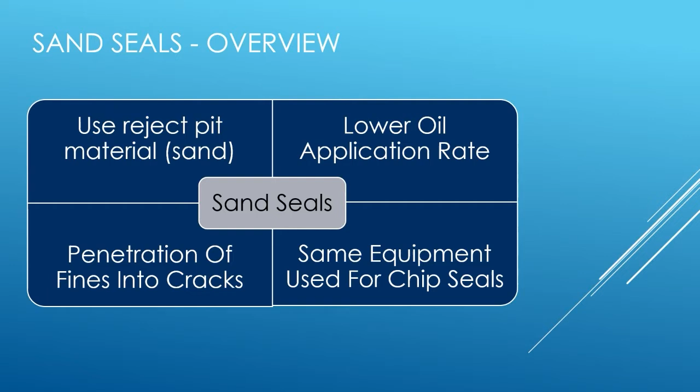So in 2019, we did the first sand seal in LaMoure County in probably 3 or 4 decades. We used the same oil that we use for our chip seals, CRS2P, but at a much lower rate, less than half the rate of a chip seal.

We used it at a rate of 0.17 gallons per square yard. That was the average number I found when looking up different projects that have happened in the past, so I just went with the middle range, and that worked really well for us. It had good coverage and the sand stuck really well.

We did fog seal it just like we would a chip seal—we fog sealed the sand after the project, after the final brooming. We did it at the same rate as our chip seals, just over 1/10 of a gallon per square yard, with the same type of oil we use for fogging our chip seals.

For the sand, we screened our sand piles over a 3/8 minus screen, so we ended up with 3/8 minus sand to make sure we didn't have any oversized material. We attempted to put it down at 25 pounds per square yard. We weren't entirely successful due to the sand being really wet, which I'll talk about in a few slides.

But really that was the only issue we had with the project—we ended up putting down a lot more sand than I would have wanted to.

Equipment wise, we used all the same equipment, but made a few modifications. The one individual who had been with the county when they did sand seals a long time ago retired about a year ago. The only thing he could remember was that they took the tailgates out of the trucks because the sand would tend to bridge and not come out of the truck into the chip spreader. So we just took the tailgates out of the trucks—easy enough. We didn't have any issues with the sand flowing from the trucks into the chip spreader, even with the material being really wet.

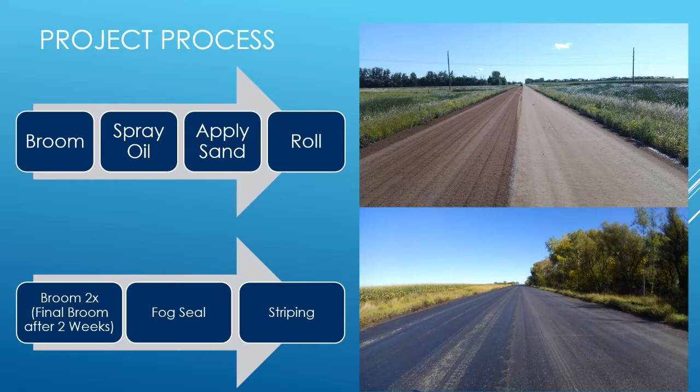The biggest issue we had was with wet sand. If you remember back in 2019, it rained a lot, and I thought I had picked a good window to move and stockpile the sand close to the project. But after we got the sand stockpiled, it rained for like 2 weeks straight, and the sand got absolutely saturated. But I wasn't willing to give up, so we went ahead and did the project anyway.

The sand was really too wet - it wanted to clump together. We had to open the gates on the chip spreader more to allow the sand to flow, otherwise it was just going to bridge. So we probably put down closer to 40 pounds per square yard of sand as opposed to 25.

With that, there was a lot of excess sand, and once it dried out, all that sand had to get removed, and a lot of it came off as dust. Right after the project, when we were brooming and from traffic, it was incredibly dusty. That was really just due to the fact there was all this sand on the road that wasn't stuck to the oil.

But since it was so wet, it stuck to itself very well and packed like concrete. The first time we broomed it, it really didn't take much off. We even went out there with skid steers to scrape it off, and the skid steers could barely scrape off the stuff that was really hard.

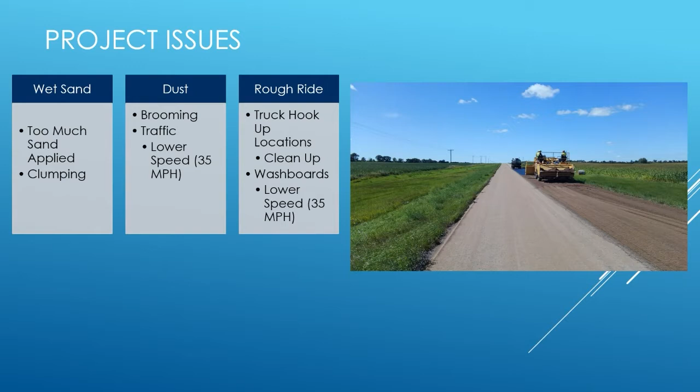So that was kind of a disaster, and I was kind of worried that we were going to have a road like that forever, but it did eventually work itself out.

It's a really thin layer. Not very much oil, not very much sand, but it did cover it really nice.

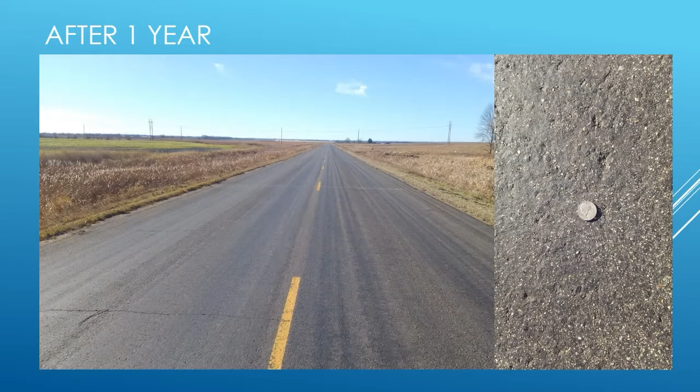You've already seen this picture. This is right after the fog seal. And then this is what it looked like late last fall. It looks the same now. So it held up really well.

The picture here on the right just shows the texture, and it's just a nice closed surface. I think it has really nice road noise, just really pleasant and even and smooth. Just really happy with how it turned out.

We didn't do any sealing of any kind in 2020, just due to some budget issues. But in 21, we got good oil prices, and I plan on doing another 15 to 20 miles of sand seals, just because from what I've seen for us, it just makes sense.

We can do more than twice as many miles as we would with the same amount of oil to chip seal. And for our low volume roads in particular, I think it performs just as well.

Moving on to Otta seals, we have not done one yet. I wanted to try one last year, but we just didn't have the money.

I do plan on doing some Otta seals this year, just to try them and see what happens. I first heard about Otta seals probably a year and a half ago now. I went to the National Local Roads Conference put on by TRB in Kalispell, Montana.

There was an individual there that presented these, and it was kind of the same thing as the sand seals. The first thing that kind of jumped out at me was there's not real tight specifications on what material you use for your aggregate.

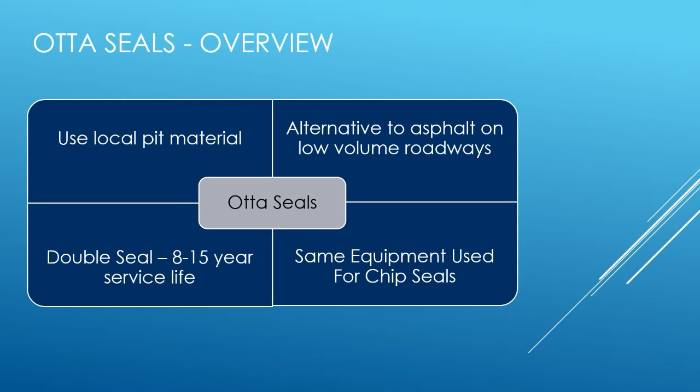So project materials, this is where the research I've done - it varies a lot on what people have used for oil and aggregate gradations. For oil, Minnesota's done a lot of research projects. I know Iowa's done some. I'm sure there's more, but those are the two I've looked at.

They have found they have really good luck by using emulsions, so the HFMS2S, CRS2P - we're going to try it with the CRS2P. But then you look outside the US, like in Norway, where this first came about, they like to use cutbacks, which we don't really use much here anymore. But it kind of seems like it doesn't really matter a whole lot what type of oil you use, as long as it's a good flowable oil, it should work.

We're gonna, like I said, try to use the CRS2P the first time and see what happens. The rates also vary on what different projects have used. They have had better luck with the higher rates, so I think we're gonna try definitely something in the 0.5 range.

Higher than 0.5 gallons per square yard. The whole idea is that the oil comes up through and there's enough oil to come up through all the rock and bind it together into, basically, asphalt on the roadway. I'll talk about how to do that here in a minute.

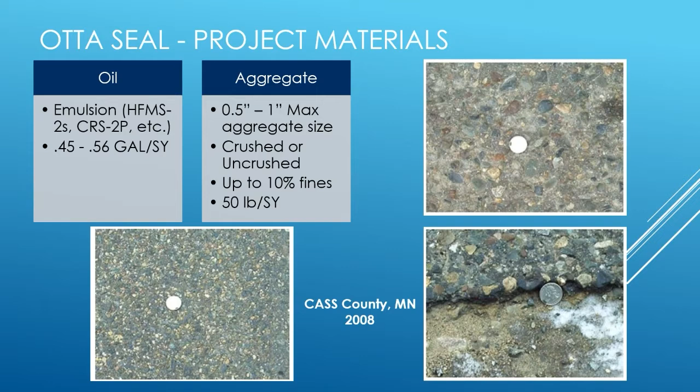These are a couple pictures I pulled from a research project done in Cass County, Minnesota. The two pictures on the right would be your 1-inch max aggregate size—you can see how big the rocks are. The one on the left would be a much smaller max aggregate size. They've had good success with all sizes of aggregates, so it's encouraging to know you don't have to have a real tight spec to make this work.

For project prep, the one thing with Otta seals is there's really no structural strength. It's very flexible, so you don't have much to deal with transverse cracks since it expands and contracts really well, but it has no structural strength. So any subgrade issues, you're going to want to fix those—it's not going to bridge over anything. You also don't want loose material on the surface, like on this roadway here. You're going to want to blade this all up, wet it if you have to, lay it back out, compact it, and seal it. You don't want to give it time to dry out and start to gravel out material again, having all that loose material on the surface.

The project process starts out just like a chip seal—you spray your oil, apply your aggregate—but where it changes is when you start rolling it. There's a lot of different information out there about rolling, but the point is you want to roll it a lot. I've read 2 to 3 days—you just keep rolling it. What you're doing is kneading the rocks and the oil, working the oil up to the surface, essentially. I think Iowa has a draft special provision for Otta seals, and they say to roll it 30 times, then let traffic on it and let traffic do the rest. The key part is the rolling—you can't roll it too much, just keep going.

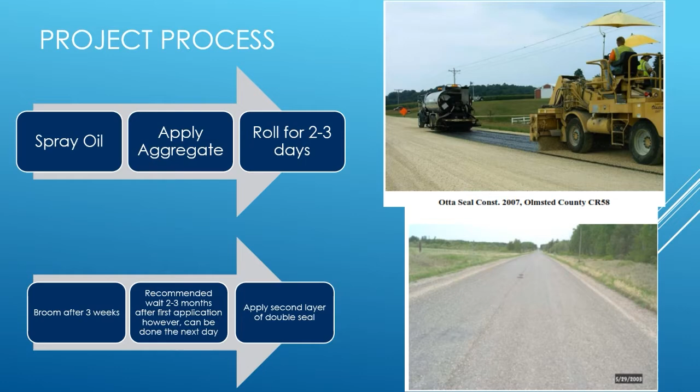So when I first heard about the Otta seal, what I was excited about, where I want to try it, is on our county gravel roads where we just can't keep up with the washboard. You all know where these are: intersections, curves, hills, any place you're accelerating, decelerating, turning, and also places where you lose the crown in your gravel road, matching into a flat bridge or a railroad crossing.

These are some examples of pictures I took last week in LaMoure County. It's kind of embarrassing, especially this one on the curve. You'll lose your lunch going over this curve at more than 35 miles an hour. And we just can't keep up. There's too much traffic here to keep this from washboarding.

So this is where I'm going to try it, like the 500 feet leading up to an intersection through these curves. Because other than these places, these roads, you blade them once a month and they're fine, except for these places. So we can eliminate these areas. We won't have to run our blades out to these roads nearly as often. At least that's my hope.

And then also, if I go back a few slides, this roadway right here was paved last spring, or this was asphalt last spring, and the existing asphalt had deteriorated to the point where we were going to grind this up and use the prairie dog money to pave it. And that's what we were telling everybody that lived on that road.

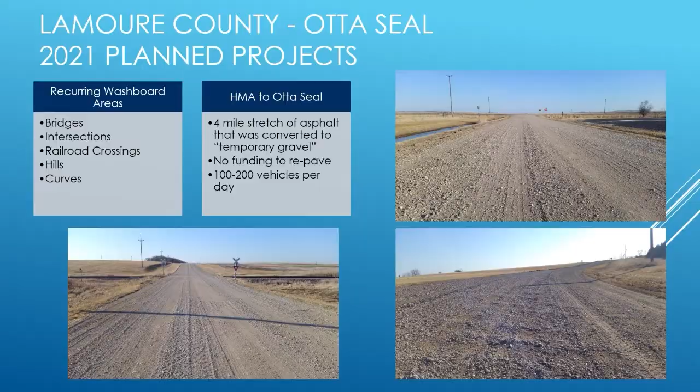All right Josh, we do have a couple questions here. The first one is, have you noticed any difference in skid resistance, or have you done any testing compared with a normal chip seal? No official testing, except that was my concern too. But in talking to people that drive that road every day, and I drive it quite often, I haven't noticed any difference. The surface, after we fog seal a chip seal, is very similar to that surface. It might be a little more dense, not as open, but I haven't noticed any difference, to be completely honest.

Great, and we have another question here. Considering you want to work the oil up through the aggregate by rolling, is hot weather beneficial or necessary? It is very beneficial, yes. You want it, just like when you're doing your other seals, to be hot.

All right, one more just popped up. How long do you expect an OTTA seal to last before maintenance is required? Well, like I showed, the service life is 8 to 15 years. If it does need maintenance, you would maintain it just like an asphalt pavement. You can patch it, and if cracks develop, you crack seal it. As far as timing, I think it totally depends on the road and the amount of traffic. Like I said, I haven't done one, but it sounds like they hold up very well. As long as you do the rolling properly and get good mix on the road, they hold up just fine.

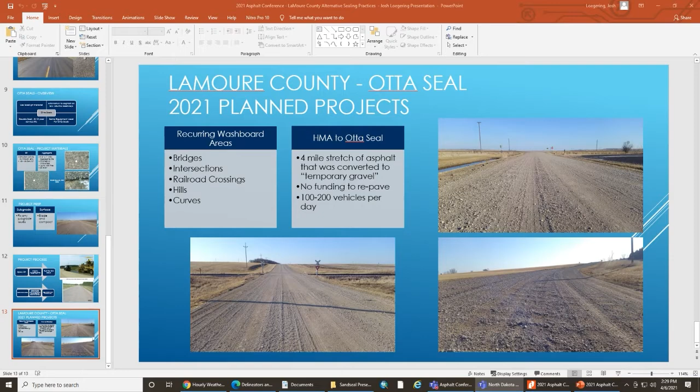All right, okay, before we move on to our next item on our revised agenda, Dale, did any other questions come through on your end?

Yeah, thank you, Carrie. Billings County said that they did an Otta seal about 5 years ago, that the DOT has plans, and interestingly enough, sitting in the room here with some of the experts, actually the king of pavement, Ken Spadine, and Dan Thompson and Steve McCormick, and the Otta seal was used. It's been used for many years. It used to be called a road mix, sometimes it was almost a cold mix. And the old roadway sections, many of our highways were built foundationally with that type of mix.

Does it work? Well, it is. Josh, you nailed it, it is a flexible pavement. What I remember from some of the people with institutional knowledge as I started is that the flexible pavement, that type of treatment, when an overlay was put on it and we didn't do our homework well, sometimes we did a thin structural overlay and it didn't perform real well because we didn't have enough structure. So oddly, that chip seal, double seal, armor coat, and Otta seal, they operate and function differently. But we've been using it for a long time.

Billings County, congratulations to Jeff and the crew for doing that out west. Thank you, Carrie. All right, thank you, Dale, and thank you, Josh.

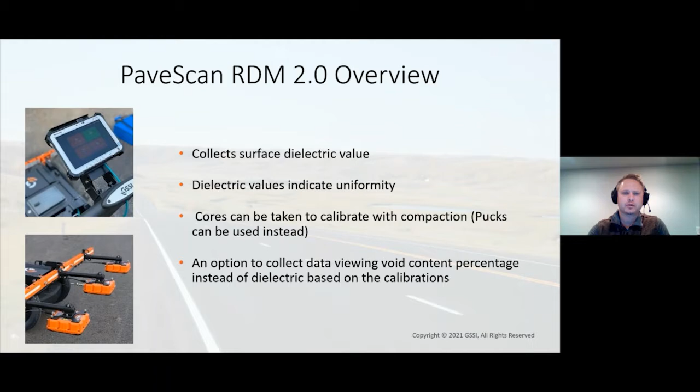This is a picture of my personal Pave Scan. I just got a single scanner going here, and this is on North Dakota DOT project Highway 8. This contractor had a longitudinal joint spec, also had a ride spec on this specific project, but this tool works phenomenal for if you do have a joint or want to see what the consistency of that longitudinal joint is.

You're collecting data in real time as you move down that, so you can really look at the uniformity factor and see if we're compacting that correctly. This contractor did use a notch wedge, and those do help significantly with consistency and quality on that joint.

This was a phenomenal project. It had some of the best uniformity across the mat, transversely, longitudinally on the joint, that we've ever collected with the dielectric, and we'll look at some of that data coming up. But again, this tool works so well for being proactive and finding quality and procedures in the laydown process for contractors.

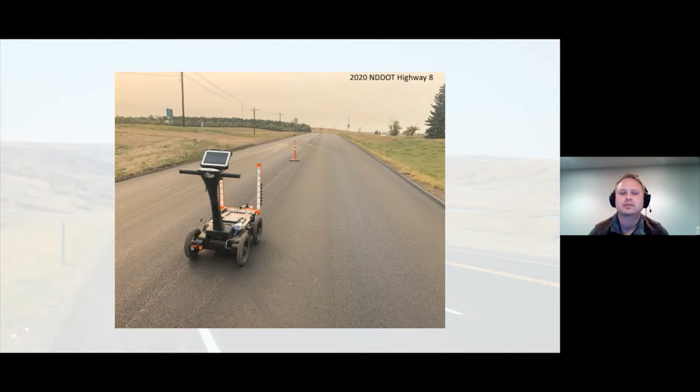So achieving quality with Pave Scan. It's used immediately after compaction. On-site full data shows the potential of possible low density patterns to be evaluated on-site. In a proactive manner, we use this right behind the intermediate and the knockdown to look for uniformity.

Typically we cut this area transversely from shoulder to center line. What we're looking for is uniformity, just consistency in the rolling in that knockdown. Then we jump behind the intermediate and do the same, and then behind the finish.

But what we can find with this tool is beyond our eyes. This actually gives us the data to look at what we're doing. And if we find an issue, we can move forward and look at roller pattern issues.

If we're running intelligent compaction, we can look at the maps through that area and see if we were consistently rolling that area. Very important, roller consistency. If the rolling consistency is good, we have to look at a paver issue.

We can run, if we're running a paver thermal imaging or anything, we can look at the thermal imaging in that area and look at the transportation, the distribution of it from the plant. Was there an issue at the plant? So what these technologies do is allow us to evaluate these areas, identify them, and then investigate them.

That's why we like to integrate technology so much into our quality control programs, because you are really managing errors and managing the production, the laydown process, and keeping those errors eliminated or low to a point where we can keep a good consistent band in the field. And that's what asphalt paving is all about, is consistency.

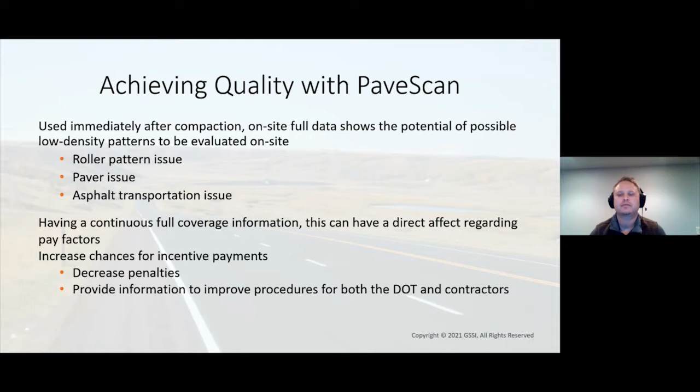When you can keep an overall road consistent, when you're coring locations all over, your band of range of density is a lot lower and typically higher too. So it works really well if you're going for that consistency uniformity factor. It provides the data for the contractor and the DOT to see if quality is being achieved, and allows the contractor to set up a good paving plan and procedures to hit quality to achieve success on these projects. It's really a phenomenal tool for that reason.

So how we use it, we use the Pave Scan as a proactive quality control tool. What we consider proactive is if we can still make modifications to that mat to improve the quality, then it's considered proactive.

The reason the Pave Scan is proactive is it produces data in real time. When we're looking at uniformity behind that knockdown or intermediate, we still have an opportunity to make some modifications to improve the quality. If we have not a very good uniform or a low dielectric in that area out of our band, we can still bring that up. We still have the opportunity to do so in that laydown process.

It provides on-site dielectric values of newly laid and compacted asphalt in real time, and that real time is very important. We can literally walk around with this thing anywhere, and wherever the sensors are, we're collecting data there. So instead of getting that data, that 1% data from coring, we can get 30, 40, 50, 60, 70% coverage of that newly laid asphalt and get a better representation of how that road is actually performing in the laydown process and then the rolling.

We have a continuous full coverage map. It provides a full length compaction contour map. We're just getting that data and seeing what's going on in that mat. Core results calibrate dielectric to compaction percentage, void, density - this is the volumetrics I was talking about earlier.

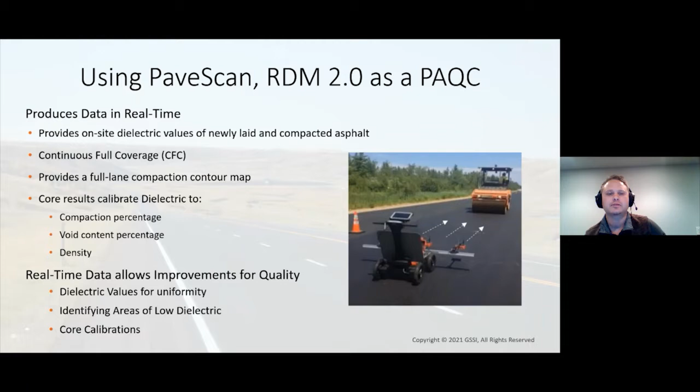So here's an example of what you would actually see using the Pave Scan or the rolling density meter, the GPR. This is courtesy of the Alaska DOT. The Alaska DOT has been using this technology for quite a while now. They're kind of the leading innovators of ground penetrating radar for asphalt. And Rich Giesel up there actually collected this data.

But what this data is showing here, this is a 3-scan system. Up on the top left, you can see LCR - that's the left antenna, center antenna, right antenna. And they actually have this in a density compaction mode.

Look down on the bottom here, you can see the orange, it says example of longitudinal joint. So you see that fall on 841.25 to 841.50, we got that dip or that fall. When we see that, we know that's a low dielectric, a low density area.

So what we can do is identify that, mark that, go back and look at our other technology tools, get a nuke gauge over there, confirm that dielectric, that density is low there, and then we can evaluate it and see what caused that low density.

Was it a rolling issue? Was it something with the thermals through the paver or the mix itself? It might be even something that is out of our control, a section issue with the aggregate or the base that's being paved on. But what it does is gives us the opportunity to identify it and move forward to try to manage and eliminate these areas.

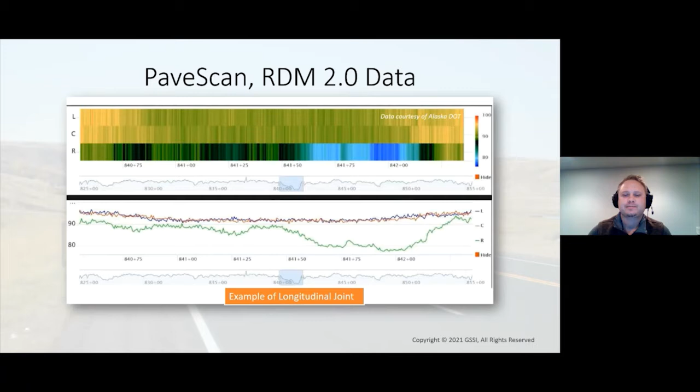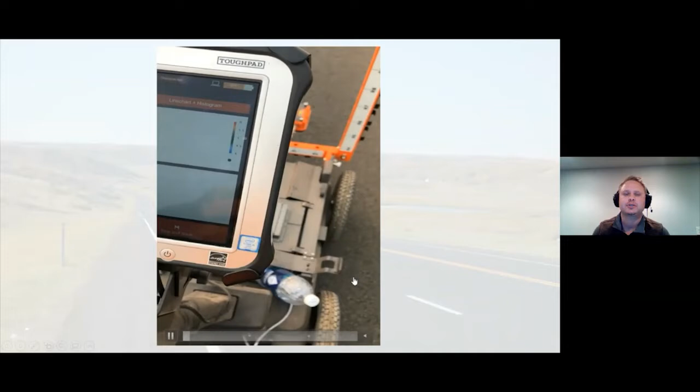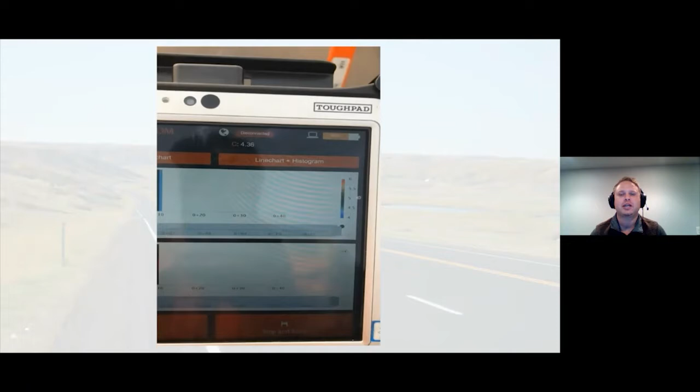This is the actual video of me running my personal Pave Scan on a longitudinal joint. This is out on a project, and I do apologize, I'm trying to talk under traffic and video and push this, and it does get a little shaky. But what I want you to look at is, this is the contractor used a notch wedge, and the uniformity, the consistency of that line.

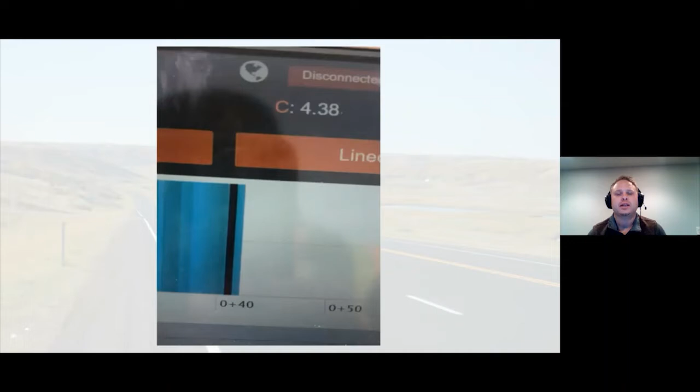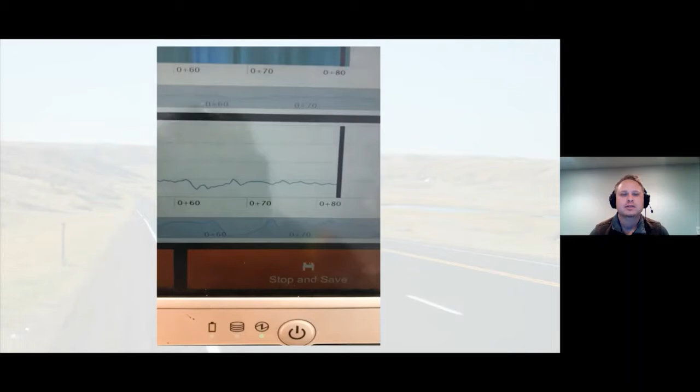And that dielectric up there, that's C. So we got a 4.38. So we try to look for that band. Anything drop below a 4.2 in this specific case, getting off the joint there, trying to push and talk, get back on it a little bit. But we'll look at the screen again here. So 4.40, I mean, very good consistency. We got a couple drops there and peaks, but overall, that's what we're looking for right there.

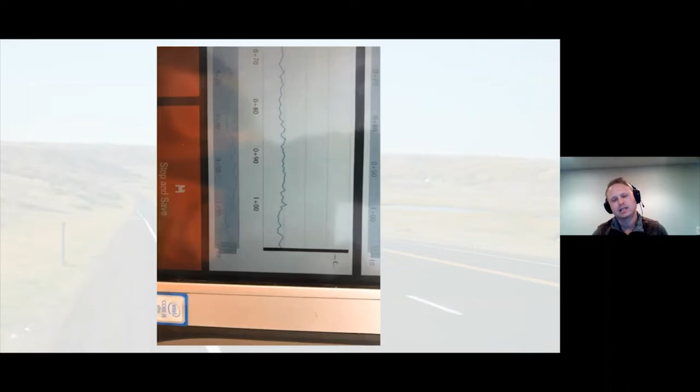Is that consistency. And coming up here, I'll actually cross the seam line, and you'll see a significant drop, and then I'll cross it back. I'll show you when.

Again, I apologize, it gets a little shaky there. Here's the drop coming up. I'll cross the actual seam line into the other right there. So you can see that difference, that dielectric will actually pick up on that seam line.

There's obviously some real low density there, and then we'll cross back and get 6 inches off that joint. But this is how we use it in the field. That's just an example of running it down a joint and what we're looking for. And that's real-time data. We're walking as we go, collecting data every second as we move that cart down.

A lot more efficient and effective than, say, a nuke gauge. If anybody's ever tried to nuke a joint, it can obviously be frustrating. You've got to sit level if there's any kind of gap or bump there. It's moving around trying to get that nuke gauge nice and flat, and this way is just way more efficient, with more data to really evaluate that asphalt section.

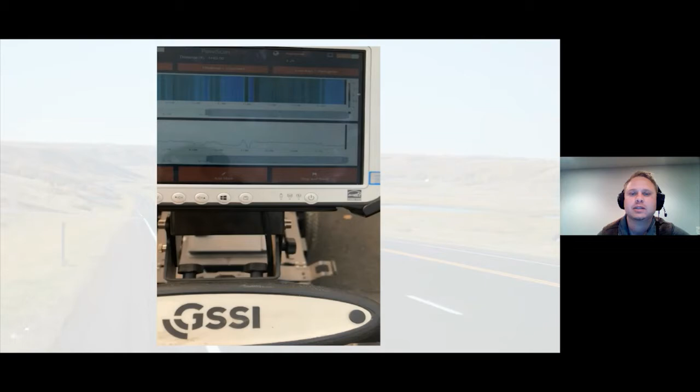Here, we'll just look at lot 2. So 10 shots, say there's 5 cores, the average in that lot was a 4.4 dielectric collected, timed on those core locations. Then once we get the extracted results, we do the same thing, average them. We break them down and look at them individually, but that's too much data for us to look at right now in this presentation.

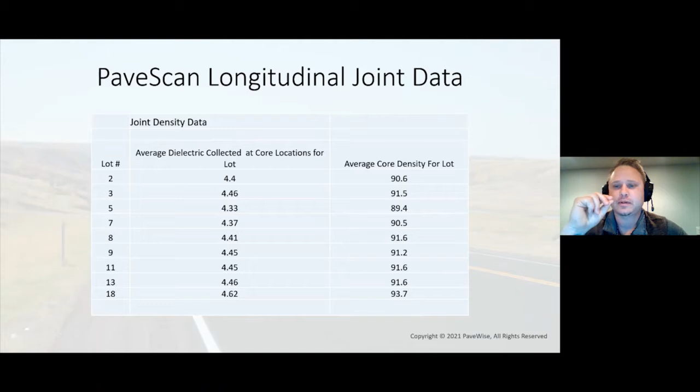So lot 2, the average core density was a 90.6, and the dielectric from the average of the time mode on those core locations was a 4.4. So we're at a good density there. 90.6 is actually a little bit of an incentive, I believe, in the formula for density, joint density. But then if we go down and look at lot 9...

We got a 4.45 average, a little bit higher than lot 2. But our average came back on the extracted cores at 91.2. What I found really unique about using this tool, on this specific project where we had unbelievable consistency and uniformity across the whole mat and on the joint, is look at lot 8, 9, 11, 13, 3.

The dielectric average and the core average - there's 4 or 5 days where they're almost identical. It was just astonishing on this project, walking down 4 or 5 miles and seeing that band so tight, and seeing how accurate this dielectric can actually be in comparison to the average cores.

And you look at lot 18, 4.62, obviously quite a bit higher dielectric. Well, the cores came back super high on that, in that specific lot, 93.7 on a longitudinal joint. That's pretty amazing - all these are really good numbers.

The only one that's a little bit below where we want it to be is lot 5, 89.4 average on the density there, and our dielectric shows that it was lower, on an average of 4.33. So it tells us where we are and where we need to be, and it works pretty well for that reason.

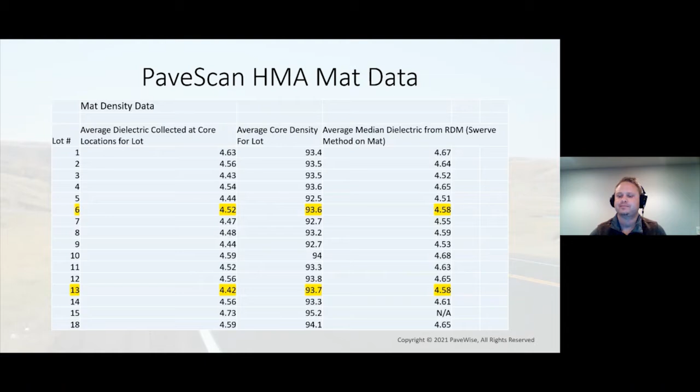So here we're finally getting into the end, but why PaveScan GPR testing? Why is this technology becoming so important and popular and trending within our industry? It's a proactive procedure. We can use this proactively behind rollers, use it to really enhance quality in the laydown, the rolling, the whole process in the field.

There's no physical damage to the asphalt section. We are not extracting cores. The other big thing that's really unique about this tool is we can do it within the construction limits of the asphalt paving. We're not doing it early in the morning or late at night in low light conditions where safety is a big concern. As that operation's moving down, we can be right behind collecting data.

So it's a lot safer way to collect data, and we're getting a way more accurate representation of the entire asphalt section. When you can collect 25 to 60 to 75% more data just by swerving and using the scan system, compared to the 1% you get from cores, you're getting a really accurate representation of the entire asphalt section.

You are really understanding what you're doing. You're not making judgment calls based off of 1% of how your cores came back. You are making modifications and adjustments based on more than half of the data coming back on that mat section, so you're making way better modification and adjustment calls for enhancing quality in that section.

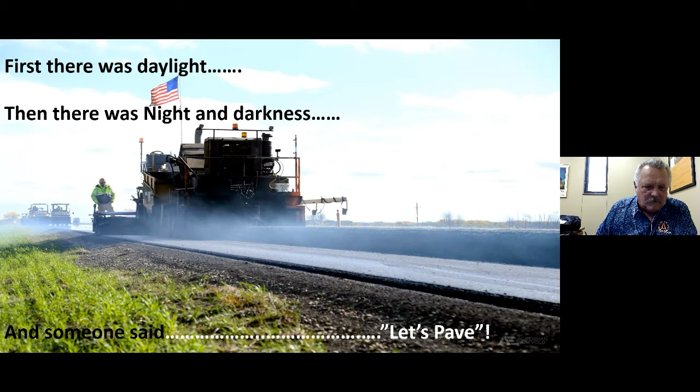This is a virtual event, and to start things off, this is the way we kind of looked at nighttime paving. I mentioned this to Dale the other day, and he said first there was daylight, then there was night and darkness, and then someone said, hey, let's pave. So that's where nighttime paving came from.

One of the things we look at when we talk about nighttime paving is worker safety, of course. It's been a major concern because it's believed that nighttime paving can create hazardous work conditions. There haven't been a whole lot of studies that indicate this, but there's been a few things that I think are kind of interesting.

Arditi did a study in 2007 that concluded that most work zone crashes occurred in clear daylight and good weather conditions. However, a study done previous to that in 1998 by a man named Bryden concluded that one-third of all nighttime work zone accidents involved impacts with either traffic control devices or safety features introduced into the work zone because of activity - equipment and people and that sort of thing. However, 37% of those accidents caused serious injuries to both the motoring public and highway workers.

So as we move forward and talk about nighttime paving, I think it's critical that we put safety at the forefront and think about how we can get this done without causing injury to either the motoring public or, of course, our folks in the work zone.

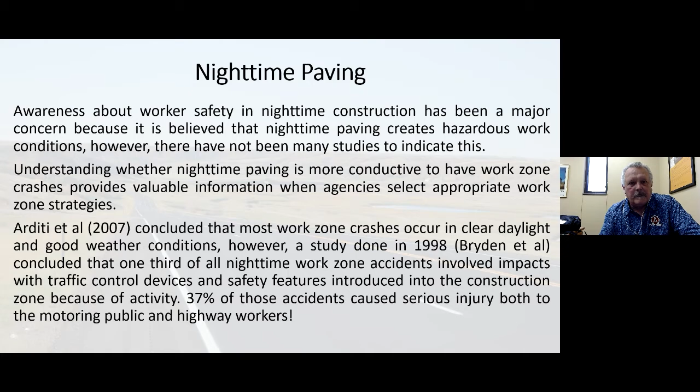Nighttime paving, plain and simply, can be dangerous, okay? We can be looking at things like reduced visibility, worker fatigue. One of the issues we see a lot is the fact that we're putting folks into a different operating time frame than they're used to. So can they sleep during the day? Or are they getting enough sleep so that they're not getting fatigued at night? Lighting issues - the position of our traffic control devices and glare from lights can be an issue.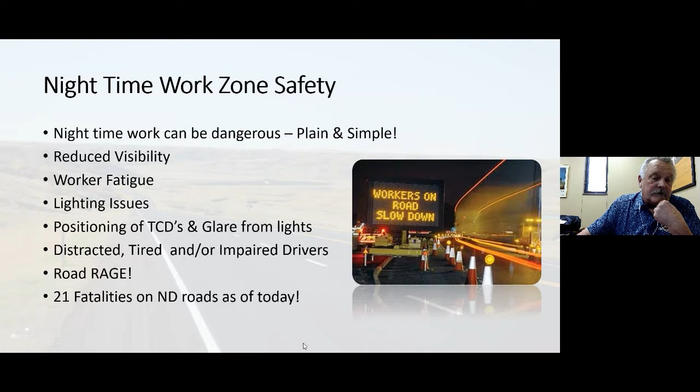Distracted, tired, and or impaired drivers. Road rage. And just as a note, I had something pop up on my screen here, I'm not sure what that is, for soils testing. Just as a note, today I went online and I looked at the Vision Zero website, and as of today, we've had 21 fatalities on North Dakota roads, which is 21 too many.

I don't know if you folks are seeing that or not, but when done safely, there could be a lot of benefits when it comes to nighttime paving.

First of all, in a lot of areas, you're going to see lower traffic counts. You could be looking at reduced temperatures, reduced delays for motorists and construction vehicles.

One of the things that we saw when we were working out west quite a bit in my past career was side access control. So the access roads coming in off the sides, farm to market roads, that sort of thing, were sometimes difficult to control. So you had extra manpower and that sort of thing on hand.

It's not uncommon in southern states like Arizona, where it's very routine to do nighttime paving, just because, especially on asphalt jobs, the temperatures can reach over 100 degrees during the day. So it's difficult to put asphalt down.

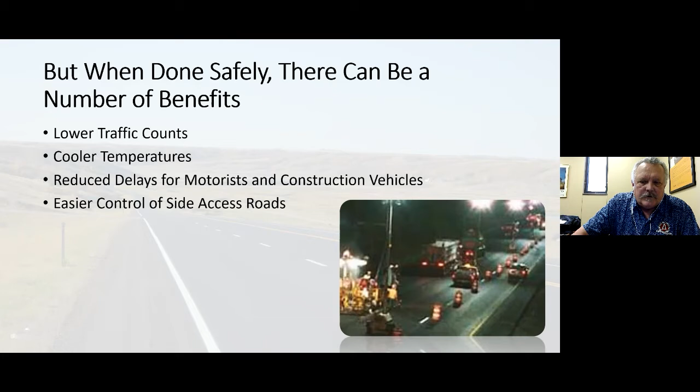Two ways to ensure that there's safe construction: number one, let's make sure that we properly train our work zone employees, starting with job safety analysis and daily work huddles. Keeping them involved and keeping them in the know as to what's going on is imperative and extremely important.

And then we need to insist on maximum retroreflective visibility of both our traffic control devices and our garments. If we're spraying tack oil, are we putting it on our cones and our tubular markers and our barrels, so that we're actually diminishing the amount of retroreflectivity that we've got on that work zone?

So we've got to make sure that the traffic control devices are not only clean, but are in good shape so that they're reflecting well, and that the garments that we're supplying our employees are the highest possible retroreflective visibility that we can get.

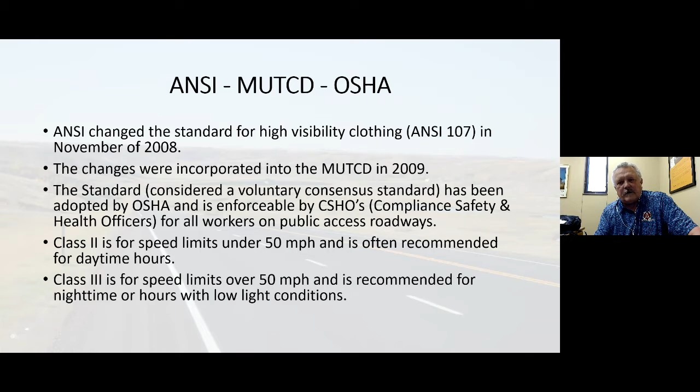Step 2: everything we do in the daytime, we can do at night with a few different steps. One being the correct level of lighting, figuring out what kind of lighting we want to use, either diffusers or balloons versus traditional lighting.

LED has made a strong entry into the marketplace when it comes to temporary lighting in work zones as well, and most of those are incorporated with balloons or diffusers.

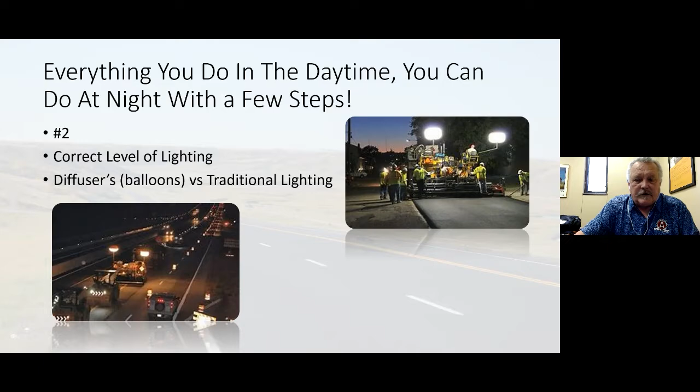Night work is considered a 7-hour period, believe it or not, which includes hours between midnight and 5 a.m. Usually between 11 and 6 is when we see the work getting done. Now that varies a little bit.

And of course, as you know, in North Dakota, when we get into these northern locales, the days get pretty long in the heat of summer and get shorter as we start reaching fall and winter. So that can change a little bit as far as the night work.

Night workers should not work more than 8 hours in a 24-hour period where such work involves any special hazards or heavy physical or mental strain.

There again, are we night paving for a long period of time, or is it something that we're going to do for a day or two, or a week or two? That all has a bearing on how our workers are reacting to the work that's being done.

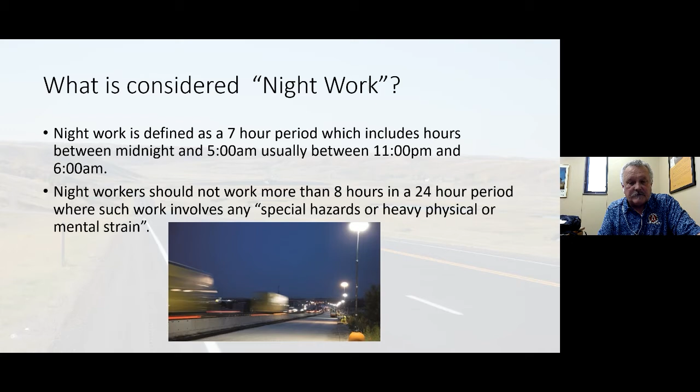One thing that should be done is a safety management plan. What we're talking about with a safety management plan is looking at what the risks are, what the processes are. You might take into consideration traffic flows, how many trucks we're using, that sort of thing.

It's a document that spells out how the work is going to be done.

Are we using a pilot car to take the motoring public through our work zones? Are we using flaggers? Are the flag persons at all the access roads, side roads? Are we using 2 pilot cars? We had a project in Watford City that was really interesting in that the queues were so long that we were using 2 pilot cars, one at the beginning of the queue and one at the end of the queue, so that we knew where we could turn around and start heading the other direction.

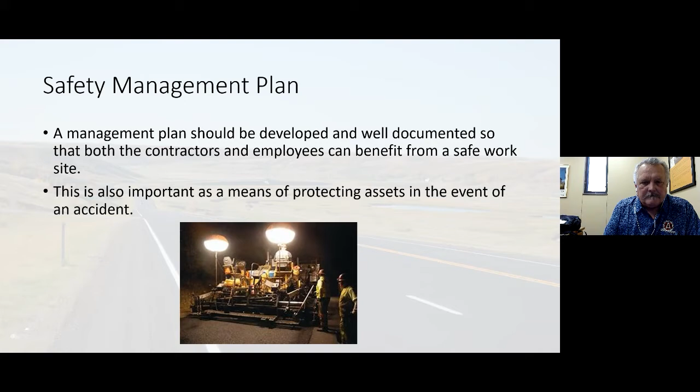Our traffic control plan. We normally have to have a traffic control plan on every highway job. If we make changes, and all of a sudden decide we're going to start doing some night paving, we have to change our traffic control plan to reflect that. So that's really critical. Are we going to put additional traffic control devices out there to safely guide the motoring public through our work zone? Those are the kinds of things. Where are we placing our lights? Is it a static location? Are we moving? We need to consider all those things in our traffic control plan and our safe operating plan.

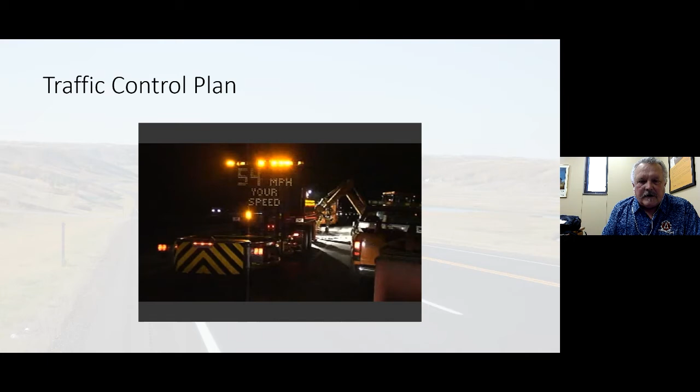Are we using mobile barriers? Are we putting up things like Jersey barriers on long-term projects that are going to take a while? That sort of thing, so that if we have an errant driver, we can protect our workers.

A site hazard control plan to consider some of the various factors. First of all is the risks, and I can't possibly go through all the risks right here, because I'm sure that you folks that have done some nighttime flagging or nighttime paving will think of a few that I don't have here. But some of the things to consider that I've seen in the past are breaks for flag persons. We stick them out there to do a job, and are we letting them have bathroom breaks? Are we letting them take a little time to have some lunch? Are they getting replaced occasionally? Things like that.

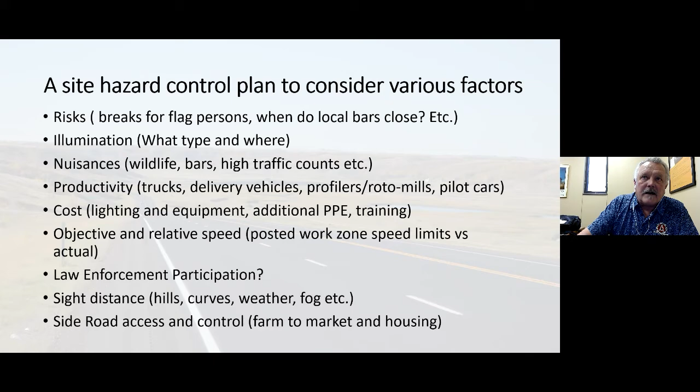And then the other thing to consider as far as the hazard control plan is the side access, the side road access. Do we have trailer courts? Do we have housing developments? Things like that off to the side, farm to market roads where we have to control that access going onto the road that we're actually paving. So that becomes a little bit of an issue.

Okay, light placement. Is it a mobile job? Does the work move forward as the paving progresses?

That's kind of a critical area in that if we're doing our work, if we're asphalt paving, we're not sitting still. We're not sitting in one area for very long. We want to keep moving, and our light has to move with us.

So it depends on how we're mounting these lights. Are we pulling a light plant behind a truck or trailer, or are we mounting a piece of equipment? Are we equipping a piece of equipment with a balloon or lights?

If we're pulling something and it's not being diffused, we have some pretty important glare issues. So we got to be real careful going around curves and hills, especially when you consider somebody that hasn't been there, that's just traveling on this road. They're not local, and all of a sudden they come around a curve. Are they going to be blinded by my lights that I'm using to help pave? So that's a huge consideration.

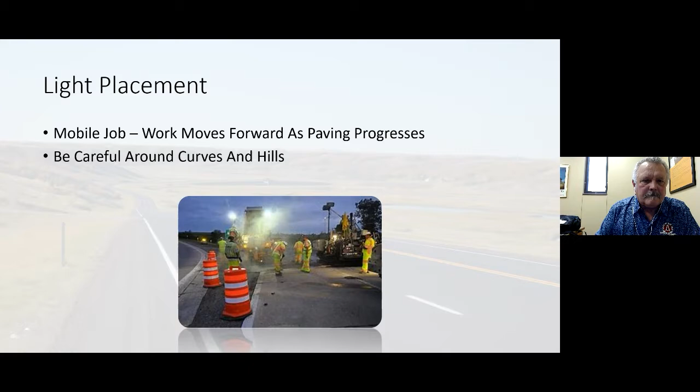Here's an example of an LED balloon with a diffuser on it on a paver. It helps a lot to eliminate the glare, and it provides light in a 360-degree radius.

Okay, different light levels, and these can be found on your light plants and with the types of bulbs you're using in the plants. Level 1 is 54 lux or 5-foot candles. Those are supposed to be used for all work operation areas, setup or lane or road closures, tapers, and flagging stations. Okay, those are the lowest level that we've got out of the 3.

Level 2 is 108 lux or 10-foot candles. Those go around areas on construction equipment, paving equipment, milling and concrete placement and removal.

Level 3 is now we're climbing up to 218 lux or 20-foot candles. Those should be used on pavement or structural crack and pothole filling, joint repair, pavement patching and repairs, installation of signal, electrical, and mechanical equipment.

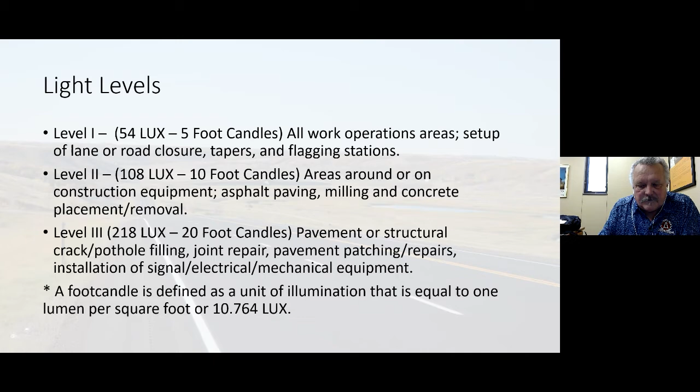If we're using the old portable light towers, either the ones that crank up or even have the hydraulic lifts now, those should not rotate outward more than 30 degrees. If we're out more than 30 degrees, we have a really high chance of doing some blinding light and some glare. The other two that we're seeing more and more of are the balloon lighting with diffusers and LED lighting.

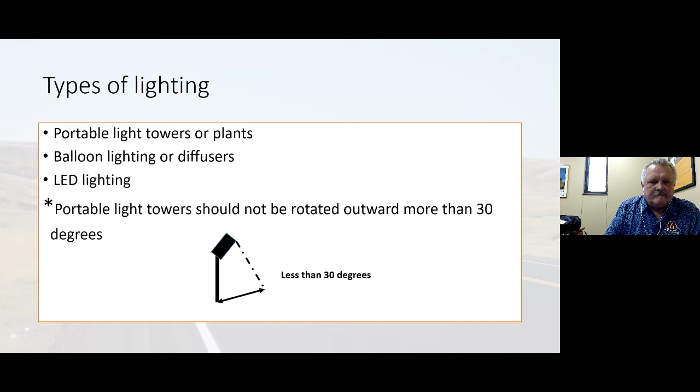Glare control. All lighting should be designed and operated to avoid glare that affects traffic on the roadway or workers within the work zone.

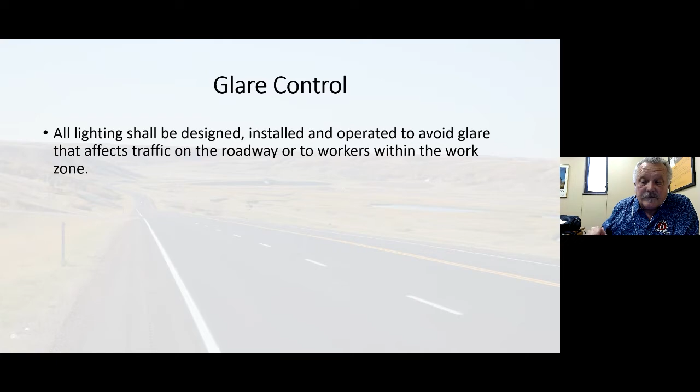Flag person training. We may require additional training for our flag people. I don't know how many flag people we have here today, probably not too many, but we probably have some folks responsible for them. And I got to tell you, that's the toughest job on a construction site, toughest and one of the most important.

It's boring too, and it may become more boring at night. So one of the things we have to really be careful about is that we're not seeing flag persons with earbuds in their ears, on their cell phones, listening to tunes or texting, not paying attention to the work zone.

That's kind of a tough thing. If we're using temp agencies to bring in our flaggers, we have to make sure they know what they're doing as far as flagging. It's just critical. We have to review each night's paving to take a look at what was happening in the way of near misses and other problems.

Recommendation for Class 3 Level 2 garments. Flag persons in Minnesota are not only required to wear a vest, but also pants and a retroreflective, high visibility hat. As a rule of thumb, practitioners should ensure that motorists can see flagging stations a minimum of 1,000 feet at night.

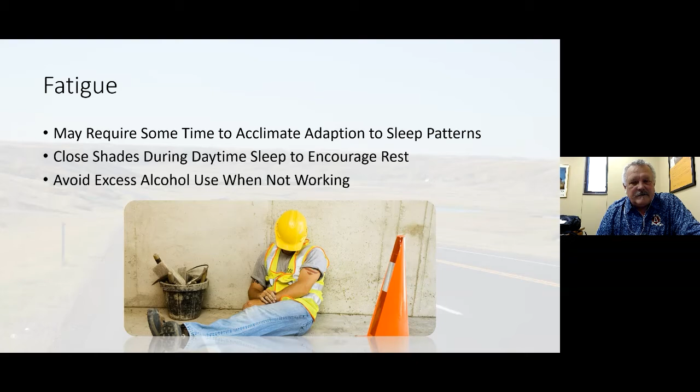It's tough to try and change your sleep habits at a moment's notice, so it may take a while to become effective. The last thing we really want to see is tired, fatigued workers out on our job site during nighttime paving operations.

Think about emergency response. Are there local numbers? Let the local authorities know what you're doing, that there's going to be some night work. See if they can give you an approximate response time in case something does happen. And then instruct all personnel as far as what they should do, who they should call.

Are we looking at the superintendent or the foreman as the first line of contact, and then they're going to contact emergency response? If that's the plan, how do they get to them? How do they know it's going to happen? So we need to communicate and make sure we're all on the same page when it comes to emergency response.

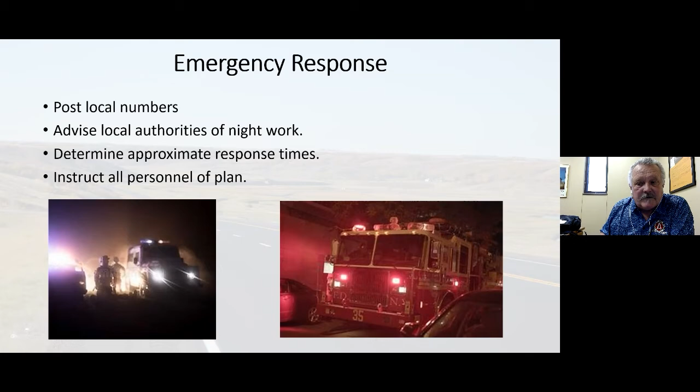Some communities that we may be paving by may have only a volunteer fire and volunteer rescue. So they for sure should be brought into the conversation so that they know what they're getting into should something arise.

And then finally, I just wanted to bring up the fact that we're looking at April 26th through April 30th coming up real soon for National Work Zone Awareness Week. This year's campaign is Drive Safe, Work Safe, and Save Lives. And they've chosen the 28th as Go Orange Day. So let's keep that in mind, the Go Orange Day on April 28th, coming up this month for the National Work Zone Awareness Week.

And then just real quickly, since it said night work paving and more, on the more side of things, I think we need to really take a look at our employees. In a perfect world, we know who they are, we know what they're bringing to work with them, in the way of baggage. Do they have something going on that's going to interfere with their job? Are they concentrating on the work they're doing, or are they distracted in some way?

Worrying about somebody dealing with cancer, or worrying about things like a spouse that wants a divorce, or bank issues and things like that. If we're going to be working at night, we need to make sure our folks are in shape and ready to go. If we do these things, I think we can successfully complete nighttime paving projects.

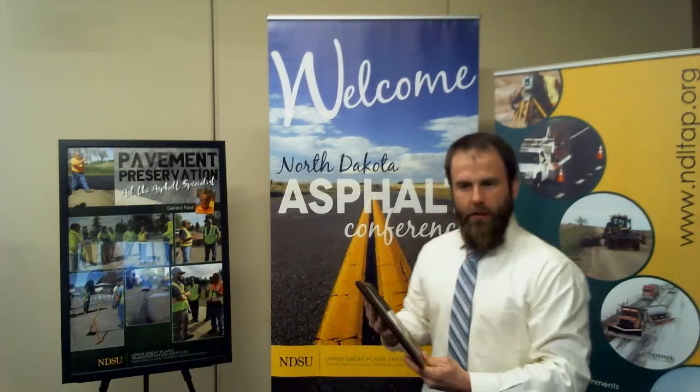So the first one I'll grab right here is 3rd place. This is the 2020 Ride Quality Award for Border States Paving. This is North Dakota Highway 73 in McKenzie County.

Congratulations. Thank you. Just a quick, I'm happy to have just made the podium, I guess, on behalf of Border States Paving. I think that, not trying to be politically correct, but I think that pretty much everybody involved in the process, from planning and design to construction, deserves a participation ribbon. But I appreciate being able to participate in it, and it's an honor for our company. Thank you.

Well, we can clap here, can't we? Yeah. Virtual flash in the background. We're muted anyways.

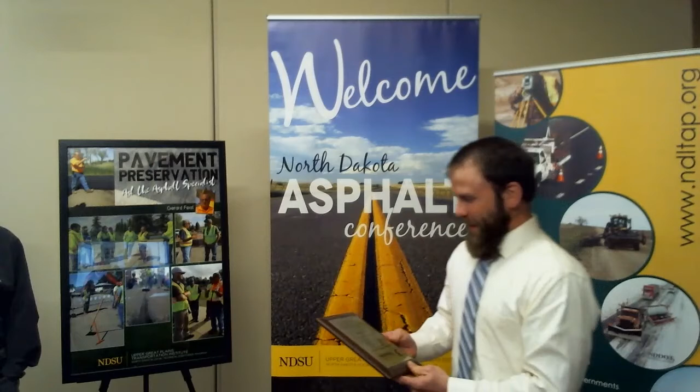Okay, and 2nd place, we have Knife River. This is for a project that was on Highway 83 in Burleigh County, from Wilton south, so Bismarck to Wilton, I think was the stretch here. So congratulations to Knife River.

I think we got Danny Schmidt on the line here from Knife River. So yeah, I'm on here. Thanks, Matt. An honor to get 2nd place here. That's great. It was a good job, top to bottom. 180,000 plus tons of pavement. The density was great on this job too. The weather was fantastic, which allowed us to do what we could on this job. 36 days of paving, 185,000 tons of mix.

Yeah, it was a great job. Thank you guys, appreciate it. We'll get this out to you.

And so in first place, Northern Improvement Company. This is for North Dakota Highway 8 in Twin Buttes South area in the Dickinson district. Congratulations, Steve.

Thank you. I definitely had to show up to do a little victory lap in person. This is a real honor for our company. I want to thank NDLTAP for putting this conference on, a great theme this year. I want to thank the DOT and DAPA for sponsoring this award. I think it's great for our industry and it promotes quality.

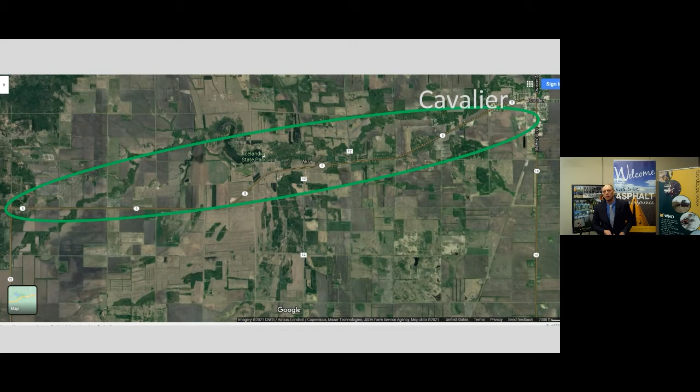Well, I'll tell you a little bit about the roadway. It's classified as a state corridor, and it safely moves people and goods for over 68 years. It maintains a moderately high degree of reliability and mobility, and supports the movement of agriculture commodities, freight, and manufactured products within the state. It's actually part of the national highway system.

So, why was it nominated? Basically, it's really endured the test of time, and it's maintained an acceptable quality or level of serviceability over its lifetime. It's endured not only the traffic loadings and stresses, but also the stresses of the environment, such as thermal cracking, frost action, freeze-thaw cycles, extremely cold winters, and it was also built on challenging soil conditions.

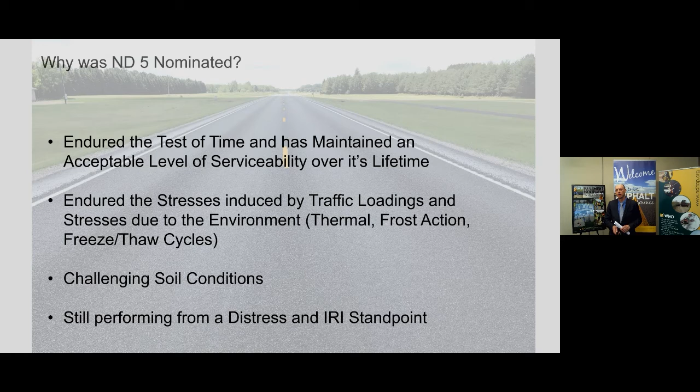With all those things, it still today performs from a distress and IRI standpoint. So a little bit about the traffic out there: it's about 1,400 cars and trucks a day, with about 14% of those heavy trucks. To date, there's approximately 3 million equivalent single axle loads that have gone over the road. It's a lot similar to other roads there too - the numbers aren't very high, but the ESALs are really fairly high compared to other roads.

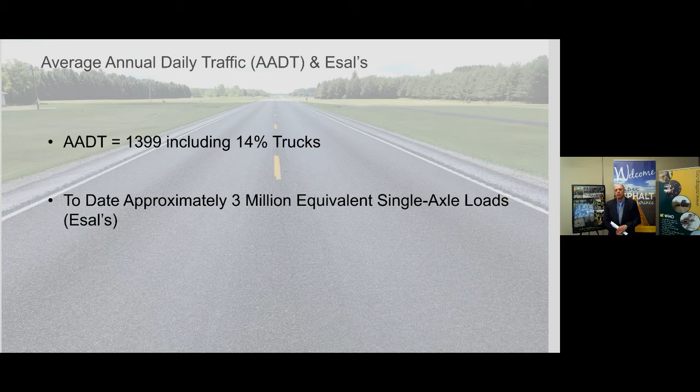Now I want to go through a chronology of the construction history. It was graded in 1952, and after it was graded, there was some traffic surface gravel put on it so it would make it through the winter okay. Already at that time, there was a project let for the next year, which would comprise the pavement section, including 5 inches of aggregate base, 2 inches of stabilized base, and 2.5 inches of hot mix pavement. There was also a chip seal - that was standard practice back then, to put a chip seal on right away. So they were thinking about preservation right off the bat.

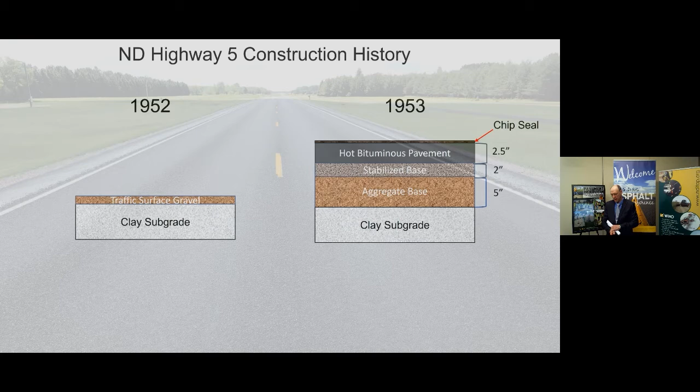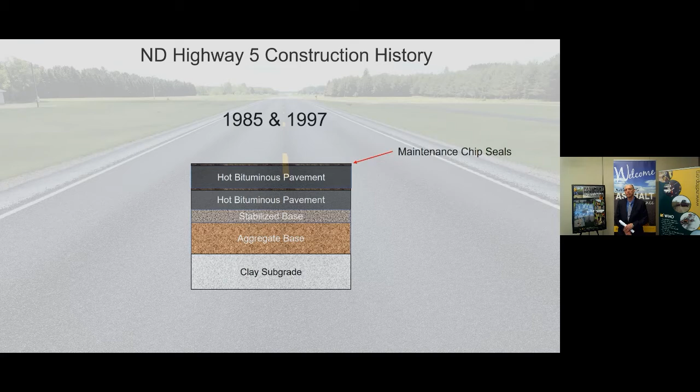Then it didn't receive any construction until 1983 - that's 30 years - and there was 2.5 inches of hot mix pavement put on at that time. Two years later there was another maintenance chip seal, and then 12 years later another chip seal. It wasn't until 2002 that another 1.5 inches was added to the roadway.

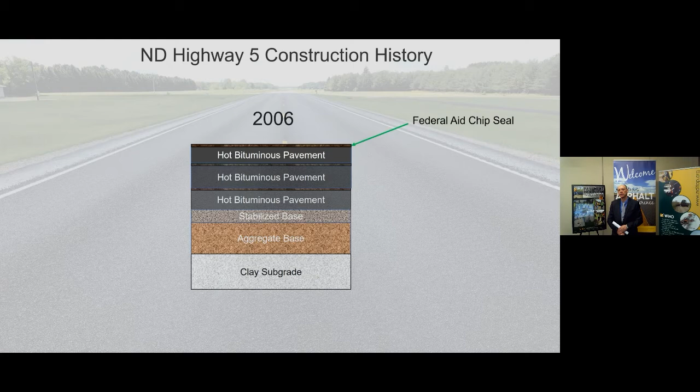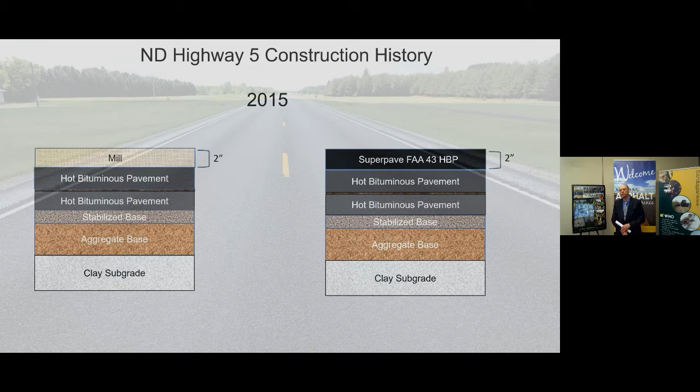Then in 2006 there was a federal aid chip seal. In 2015 there was a mill and overlay - milled off 2 inches and put back 2 inches of Superpave hot mix asphalt. The last project to date is 2019, with a federal aid chip seal over that. So right now there's about 6.5 inches out there.

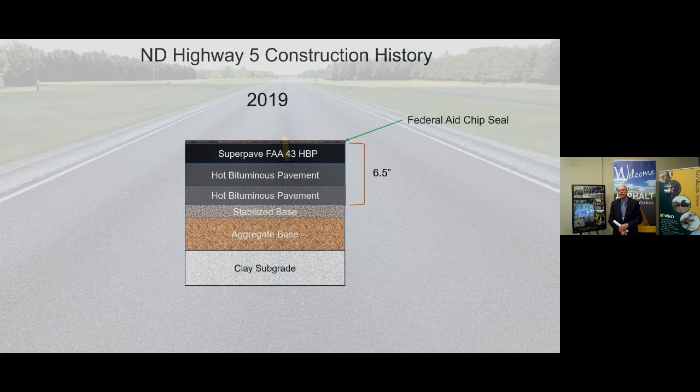Okay, so now I want to go over the prime contractors that did the work out there. It was graded in '52 by Joe Mayo and Sons. The next year, putting the pavement on, was also Joe Mayo and Sons. Then in 1983, Mayo Construction Company put the 2.5 inch overlay on. There were a couple of chip seals after that - we haven't been able to ascertain who those were for sure, so we just left them as is. If anybody knows, we'd be glad to know.

In 2002, Strata Corporation put down the 1.5 inches. The federal aid chip seal in 2006 was Moore's Seal Coat and Trucking. Knife River did the mill and overlay in 2015. And in 2019 was the Aztec Corporation federal chip seal. So thank you to all the contractors who contributed to the success and longevity of North Dakota 5.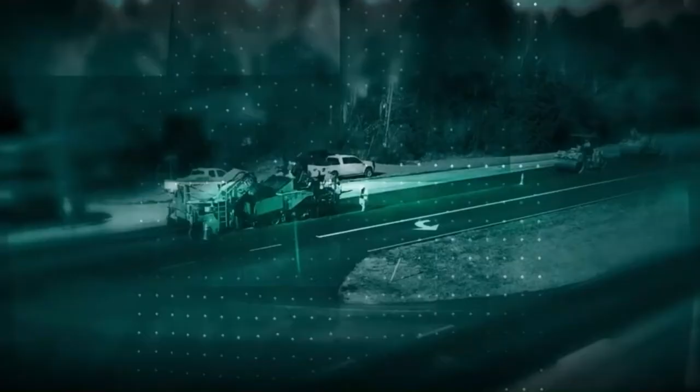America's public road network spans more than 2.75 million miles of paved roads. This system connects every major population center and is vital to our economy, defense, and mobility. With fiscal constraints and increasing infrastructure needs, agencies are incorporating life cycle thinking into their planning.

It's just like owning a house. Everybody knows that every 18 to 20 years, you're going to replace the shingles on the house, because once you let the water into the house, the cost of repairing the house goes up exponentially.

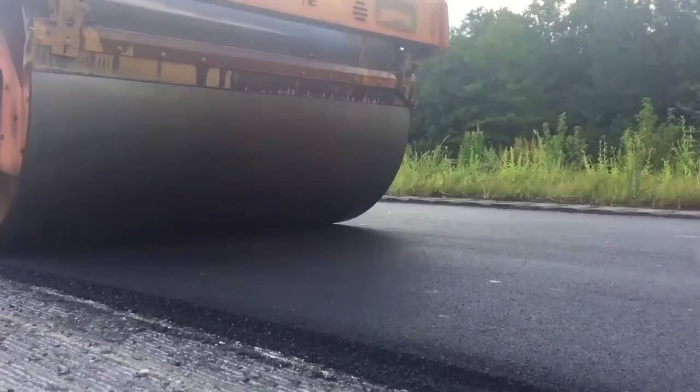Long life pavements, traditionally called perpetual pavements, are pavement designs that provide agencies with an approach that reduces the life cycle costs of a pavement. There's a lot of emphasis on keeping the initial cost down, but if we look at the life cycle cost, long life pavements are going to be cheaper in the long run.

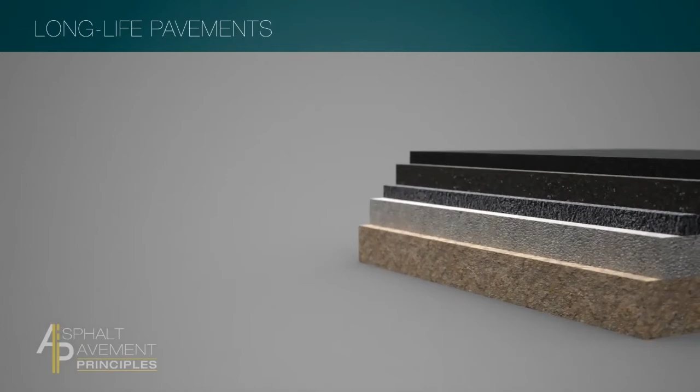And then we can clearly see that if we build longer life pavements, we're going to get a lot more for our money. Long life flexible pavements are multi-layered pavement designs. They are designed and built from the bottom up, with the lower layer designed to resist bottom-up fatigue cracking, which limits damage to the easily repaired surface layer.

So at the bottom of the pavement is where you're going to see the most tensile strain. It's really like the pavement being pulled apart every time a vehicle runs over it, kind of like a rubber band. So you want something flexible to resist that pulling motion every time it's loaded. A little bit of polymer or a little bit of extra asphalt can be very beneficial in increasing that pavement flexibility, which will in turn increase its fatigue life.

I can fix the top easily, but if my base and my sub-base are the source of my failure, now I have created a huge maintenance issue for the owner and the users in the future. So start with the proper structures, the proper foundation. When you build a house, you have solid footers.

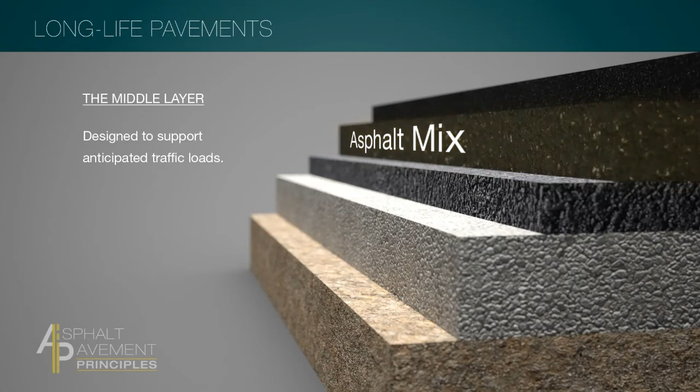The middle layer uses an asphalt mix designed to support anticipated traffic loads, and the top layer can be customized to local conditions, environment, and requirements. Good mix designs, good production, good construction practices, make sure you have a multi-layer pavement system that is well built and well bonded between all those individual layers so that it can respond to passing loads monolithically.

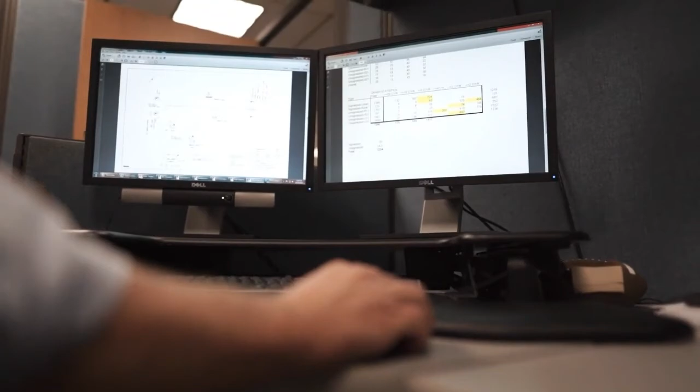And then good maintenance, good preservation and maintenance practices on the surface. Long life pavement design takes into account external factors, so agencies can forecast pavement performance and then specify an appropriate pavement structure for current and expected future needs. Some of the critical keys are traffic loading, knowing what you're designing that for.

The uniqueness about perpetual pavements is that we design it per layer to accommodate the overall loading of the pavement. So the fatigue endurance limit is central to perpetual or long life pavement design. You have to have an estimate or somehow quantify the level at which cracking is not going to occur. Or if you design it in such a way that the stresses are low enough and the strains are low enough, you're not going to have cracks that initiate and propagate to the pavement surface.

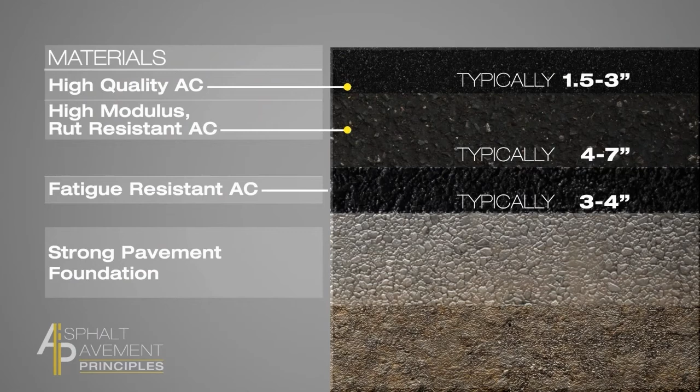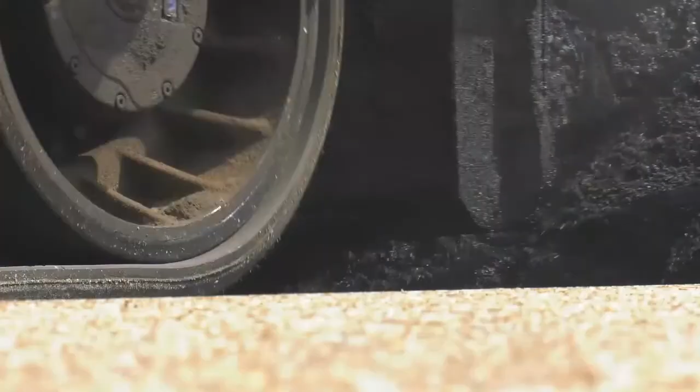Long life pavements optimize pavement structure through the right combination of thickness and materials. With bottom-up failure mitigated, agencies can focus on the relatively quick and simple maintenance of the surface riding layer. This design approach minimizes maintenance costs and reduces user delays for many highway agencies and owners across the U.S.

The Illinois Tollway, in designing its full-depth asphalt pavements, uses a long-life pavement design approach. We do look at all of the layers of the pavement system. So we've got a number of different full-depth asphalt pavements that I would consider long-life pavements. So we design with the materials and the thicknesses so that bottom-up distress doesn't happen in at least the 50-year design period that we're looking for.

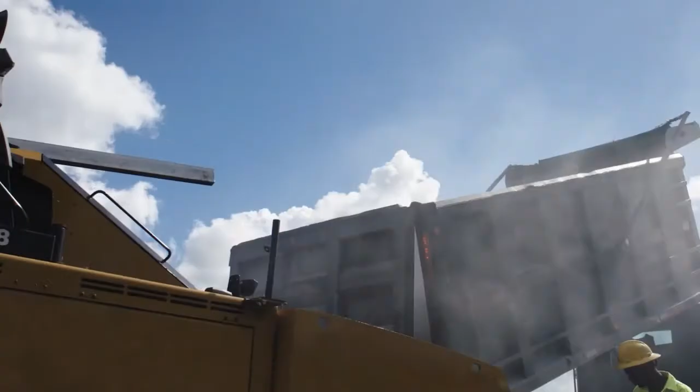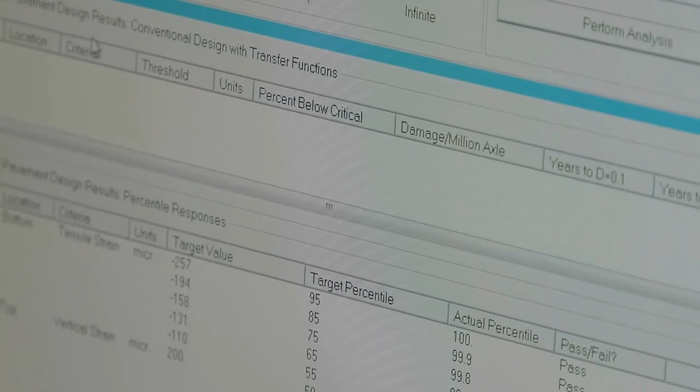Industry best practices and proven resources are available to help agencies better design long-life pavements and get longer service life from their roads. Some pavement design software applications developed through test track research include features like layered elastic analysis that enable users to design individual pavement layers, taking into account all appropriate variability. And variability with how thick the layers are, variability in the material properties, variability of traffic.

It puts all that together in a Monte Carlo simulation and estimates for you what the strain distribution is. That strain distribution can be compared back against a design distribution that we developed here at the test track to know whether your pavement passes or fails the long life pavement design criteria.

So as we start to look at mechanistic procedures, you can really see how your materials choices impact performance. So as states start to move towards that type of procedure, I think you're really going to see people be more creative and open to innovation because they'll see the results of performance.

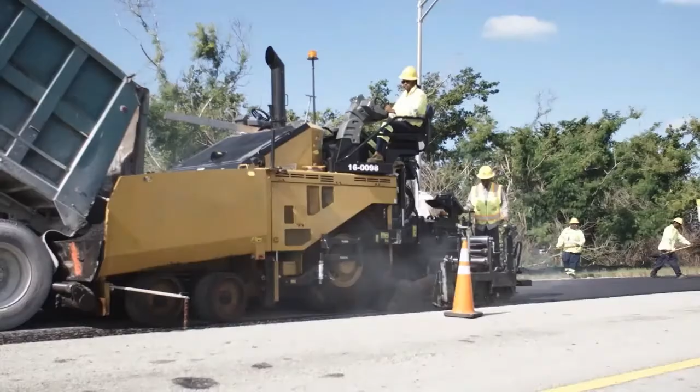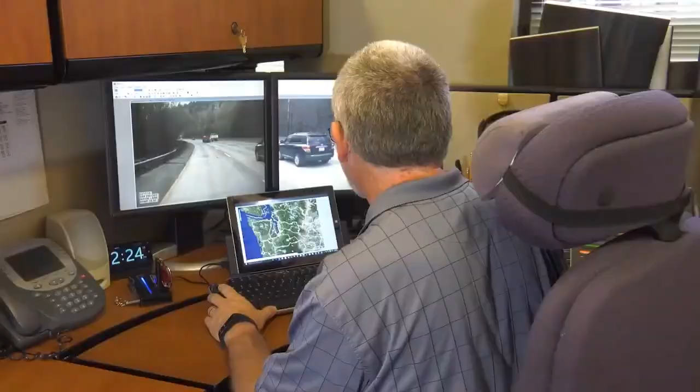With long life pavement designs, asphalt roads can be built with a structure that lasts many decades, with only periodic surface renewal and maintenance required, making it an ideal choice for drivers, engineers, and the traveling public.

All these have to come together in your long life design. It's just not designing a thicker pavement. It's designing a smarter pavement with the right materials and not thinking thicker is always better, because there is a point that you have diminishing returns, that you're just spending money that you don't need to.

Building a long life pavement for the user is really critical because they want to have something that they're driving on that's economical, smooth, quiet, and long lasting. And building it correctly, spending that next incremental dollar, if you will, to doing it that way really does provide the user a long-term performing pavement.